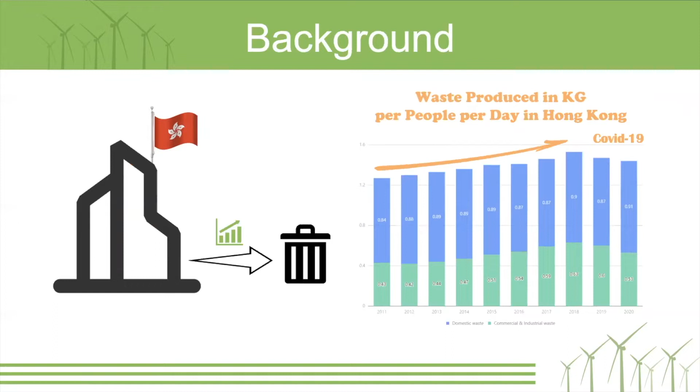In the past, the waste in Hong Kong increased yearly except for the COVID period. The Hong Kong government is also constantly trying to establish more types and numbers of infrastructure for waste processing. However, Hong Kong still relies on landfills. In order to solve the problem, the government is trying to come up with new ways.

One such plan is IWMF, Integrated Waste Management Facilities. It aims to significantly reduce the waste sent to the landfill, extend their use, and recycle certain materials to dispose of the growing amount of garbage.

IWMF will be the most modern waste management facility in Hong Kong. Here are 4 key components of IWMF: mechanical sorting and recycling, power generation, incineration, and education.

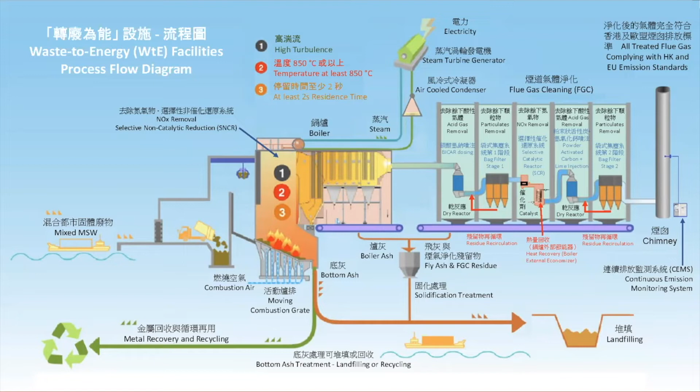After the waste is delivered from several refuse transfer stations, the moving combustion grate can divide the waste and recycle the metal. The rest will be combusted into ash, and the energy from combustion will be collected and turned into electricity. Finally, the flue gas will be cleaned through a series of mechanical methods to minimize pollution.

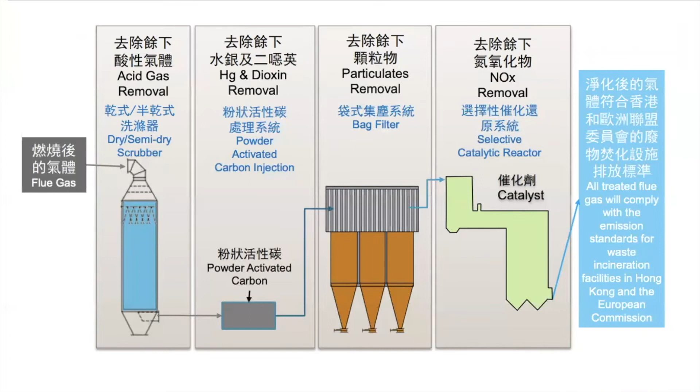By IWMF, it can reduce the volume of waste by 90% and turn waste into energy.

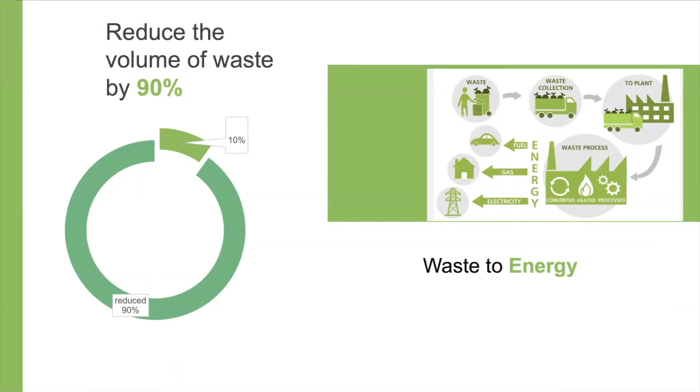Moving on to the analysis, several advantages can be seen from the iPark project. Firstly, the use of new technologies prevents pollution and waste. The use of flue gas cleaning, metallic materials recycling, and wastewater treatment makes iPark superior to traditional incinerators, allowing it to address air and water pollution issues as well as preventing metal materials from being wasted.

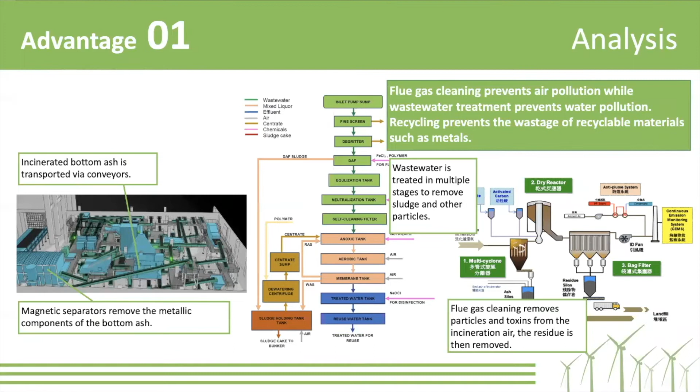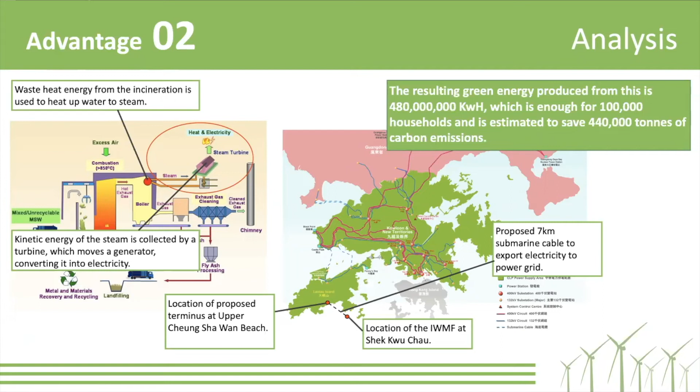Secondly, iPark also generates green renewable energy. The energy generated is enough to power the facility itself and an additional 100,000 households. This reduces demand for fossil fuel electricity, which saves an estimated 440,000 tons of carbon per year.

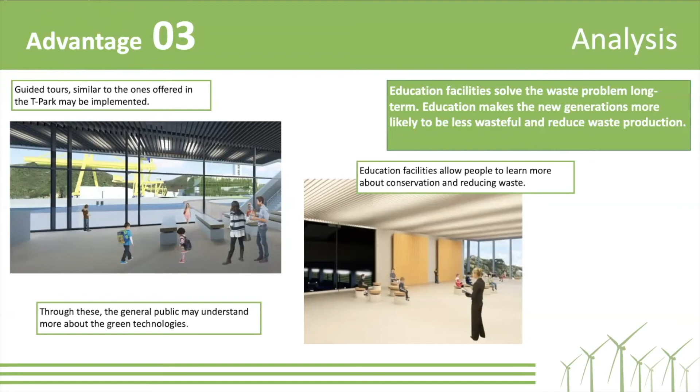Thirdly, the facility also raises awareness and education on the waste problem. A root cause behind the waste issue is the increasing amount of waste generated per capita. Through education, newer generations would be less wasteful. This allows the facility to target both the short-term issue of waste management and the long-term issue of education.

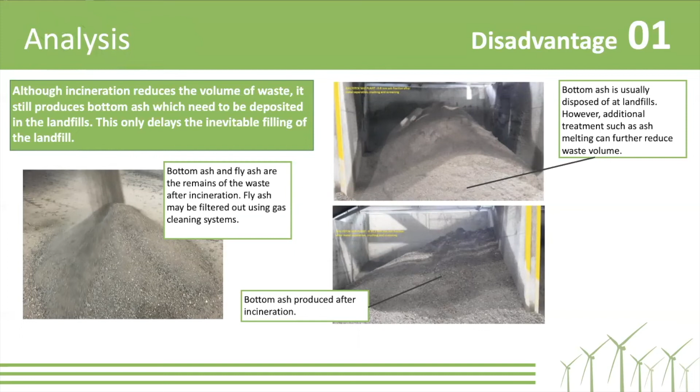However, there are still a few issues with the facility. Firstly, it does not solve the landfill issue, it only delays it. Incineration reduces the volume of waste by 90%, but the bottom ash still needs to be buried in the landfill. This means the landfills will still be filled eventually. The difference may be that it takes 10 years instead of 1.

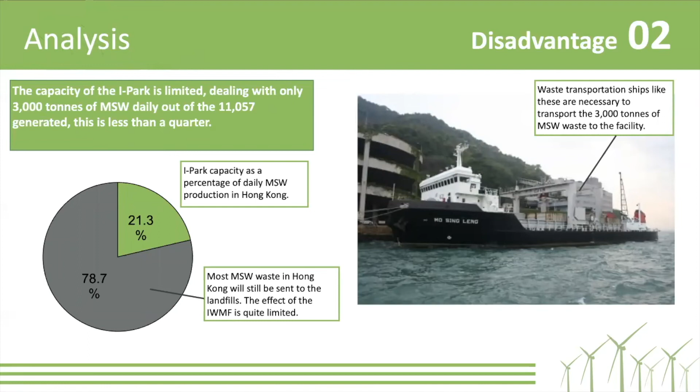Secondly, the facility has quite a limited effect on the issue. The I-Park is only able to process 3,000 tons of waste daily, which is less than a quarter of the 11,057 tons of waste produced daily by Hong Kong.

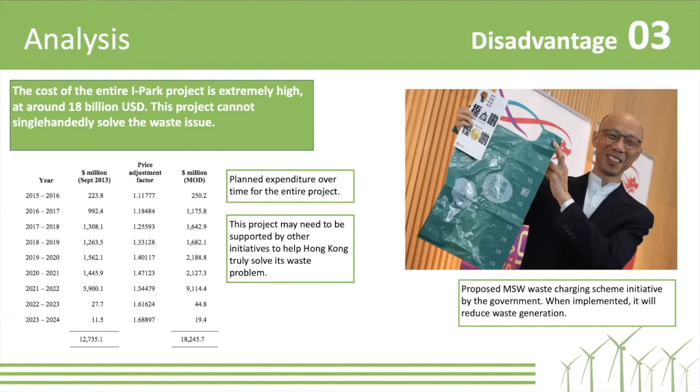Thirdly, the facility is also quite expensive. The entire project cost Hong Kong around $18.245 billion. The high cost and limited capacity of the facility means this project will not single-handedly solve the waste problem. Therefore, alternative government initiatives such as the waste charging scheme are still needed to solve the issue.

The IWMF is more environmentally friendly than the current landfill system, and it does help us achieve SDG 9, especially 9.4. But it is still not enough to deal with all the waste and make Hong Kong's waste management system sustainable. For our citizens, producing less waste can approach the waste problem from another angle and can also make Hong Kong a more sustainable city.